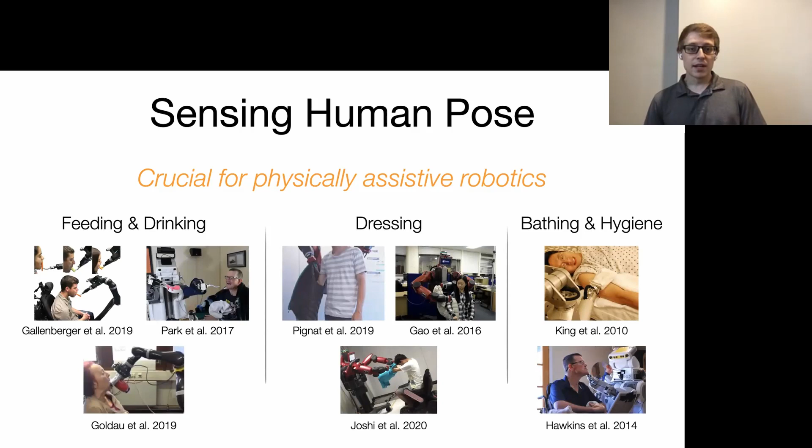Now, there's a couple different methods that robots have used to sense human pose in the past. Probably one of the most common ones is visual perception, such as with a camera. For example, you might be familiar with tools like OpenPose. However, the robot's own body and different objects like fabric garments can all visually occlude sight of a person. Another approach is force perception, where a robot is using its sense of touch or a force torque sensor in order to sense where a person's body is. But this requires robots to be continuously making contact and applying force to a person in order to sense where their body is.

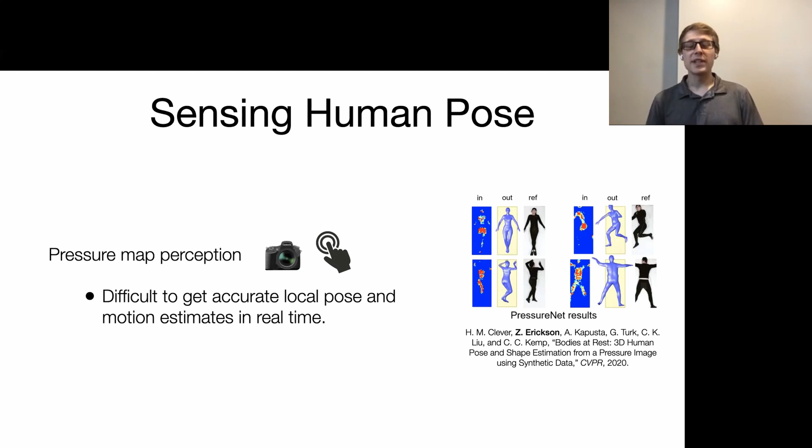And more recently, my colleagues and other research groups have demonstrated how robots can use a pressure mat on a bed in order to estimate a person's pose, as well as approximate geometries of their body, including their gender. Yet approaches like this struggle with estimating local pose details or tracking human motion in real time. But I really want to emphasize, why can't we just use a camera on a robot? It seems like the most intuitive thing to try first.

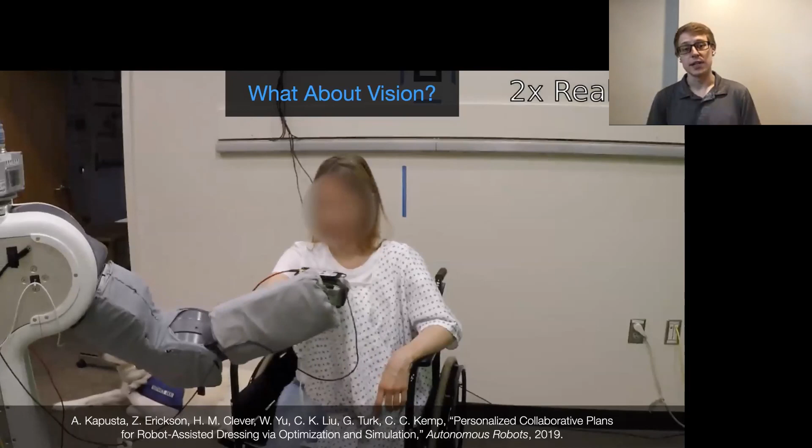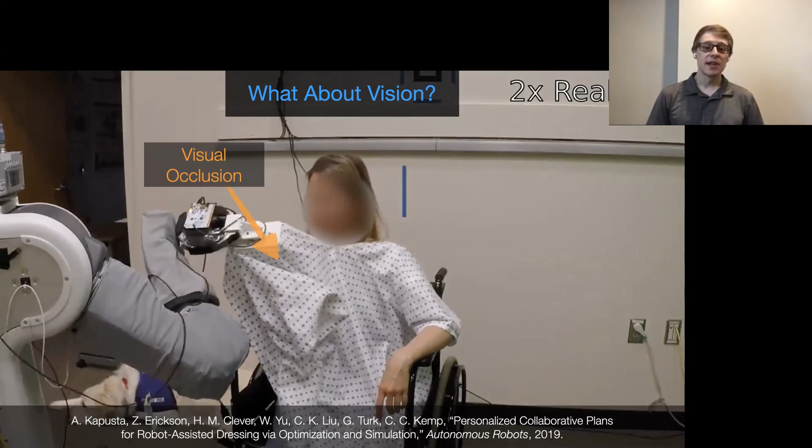And it turns out that there's a lot of scenarios in physical interaction where substantial parts of the human body become visually occluded. In this case, about halfway through this dressing scenario where a robot is helping pull the sleeve of a hospital gown onto a person's arm, the robot is no longer able to see the person's body. Not only is the robot's own arm getting in the way of its cameras, this fabric garment is also visually occluding sight of the person. So if the person is moving around underneath this cloth, the robot isn't going to be able to visually see that.

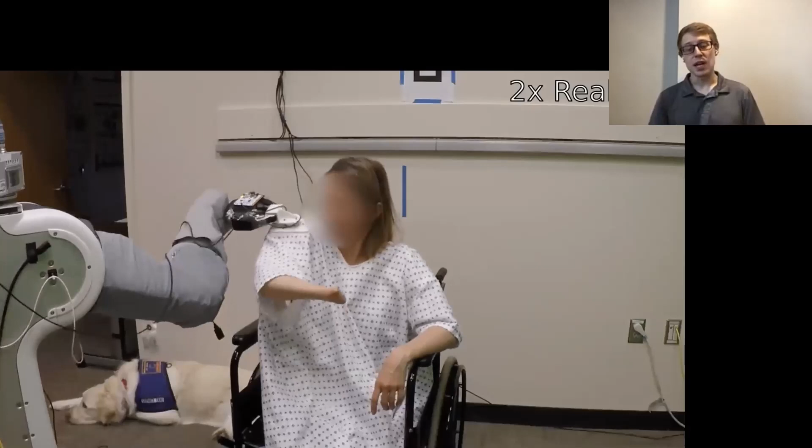And this lack of vision is one of the major challenges that capacitive sensing, what I'll talk about in this talk, aims to address. And in fact, in this video, the robot is using capacitive servoing to adapt to any arm movements made by this participant.

So what I'd like to share with you is how we've developed new capacitive sensors that can be used to accurately sense local human pose near a robot's end effector. We use learning to build pose estimation models from capacitance data, and then we evaluate through human studies how robots can use the sensor to perform servoing around the human body and adapt to human motion during physical assistance.

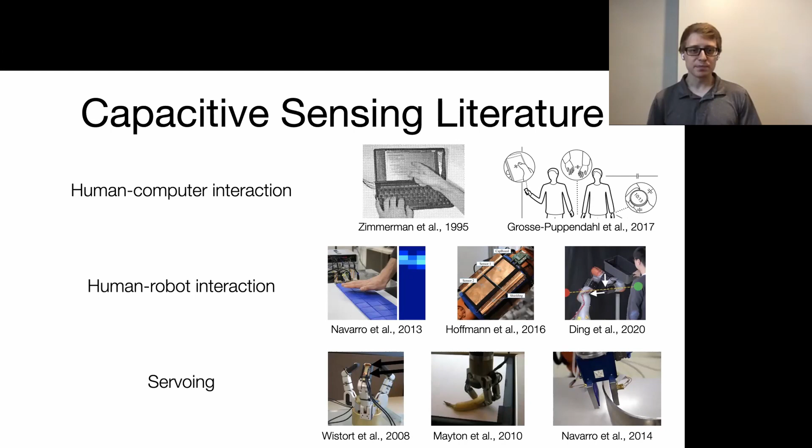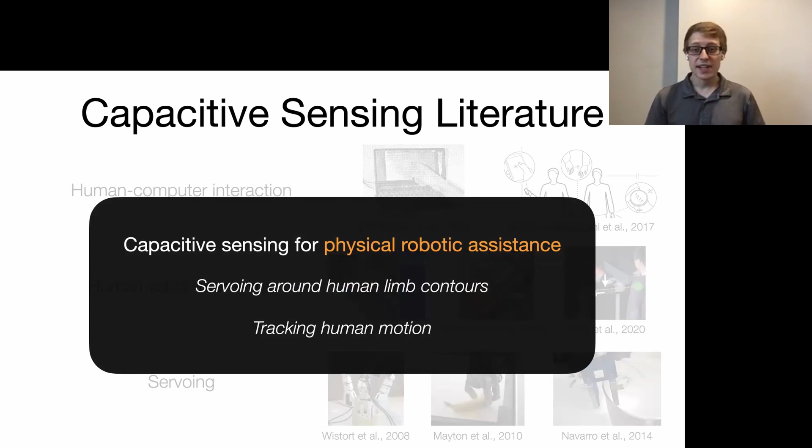However, in comparison to prior work, we explore capacitive sensing for physical robotic assistance, including servoing around the contours of human limbs and tracking human limb motion in real time. So when compared to other pose estimation approaches, capacitive sensing is offering robots a number of benefits. It allows robots to sense through some visually opaque materials, such as clothing and wet cloth. It doesn't require robots to make contact with people in order to sense them. And it also allows robots to track human motion in real time.

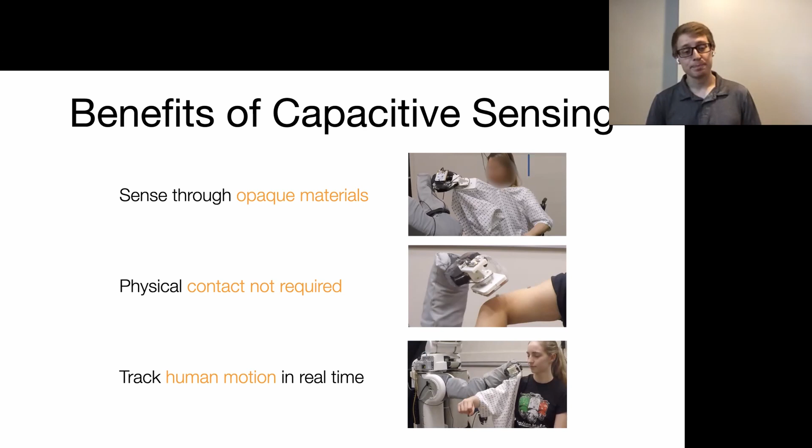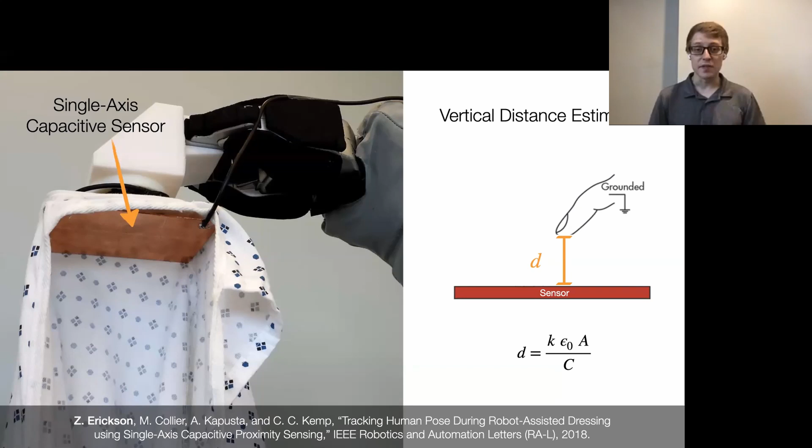So to start, we developed a single axis capacitive sensor, which can be either held or in this case mounted to a robot's end effector. Shown here, this is a PR2's end effector. And then we explore how a robot could use this sensor to estimate the vertical distance to a person's body in real time when providing assistance, such as dressing on the sleeve of a hospital gown. And with this sensor, we collected data from a single human participant as the PR2 robot moved the capacitive sensor downwards towards a person's hand.

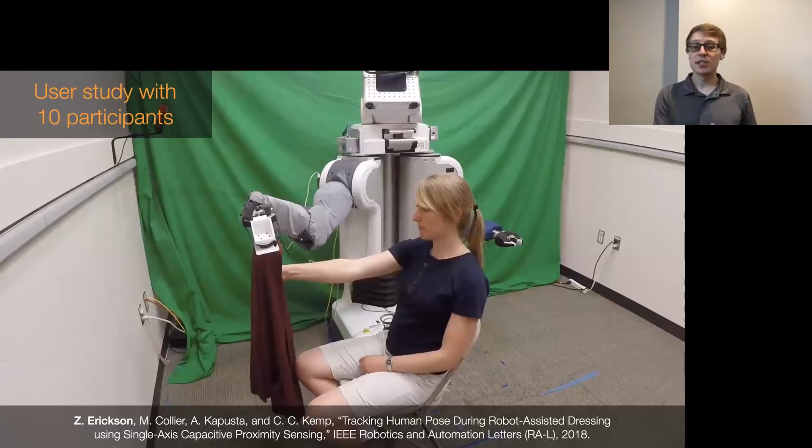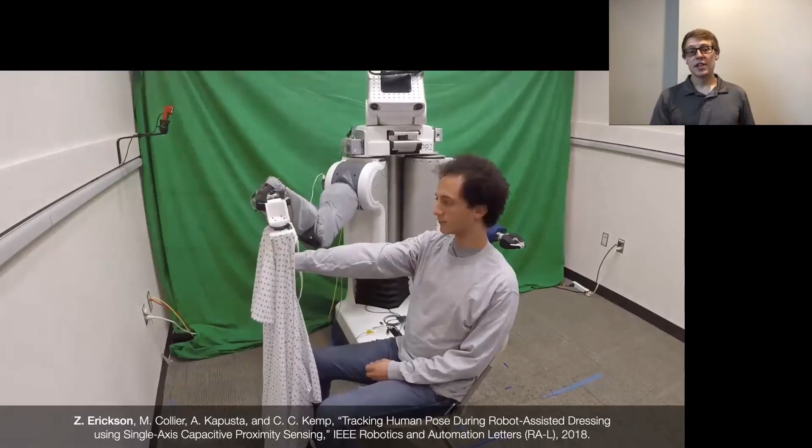We then conducted a study with 10 able-bodied human participants in which the robot used this capacitive sensing technique to sense and adapt to vertical arm motions made by participants while dressing on two different garments, both a hospital gown and, in this video shown above here, a long sleeve sweater. And this even works if participants are wearing long sleeve non-conductive cotton clothing. Despite this unscripted human motion, the robot's end effector is able to stay within approximately 5 centimeters above each participant's arm, and capacitive sensing is allowing the robot to track human motion in real time, regardless of visual occlusions.

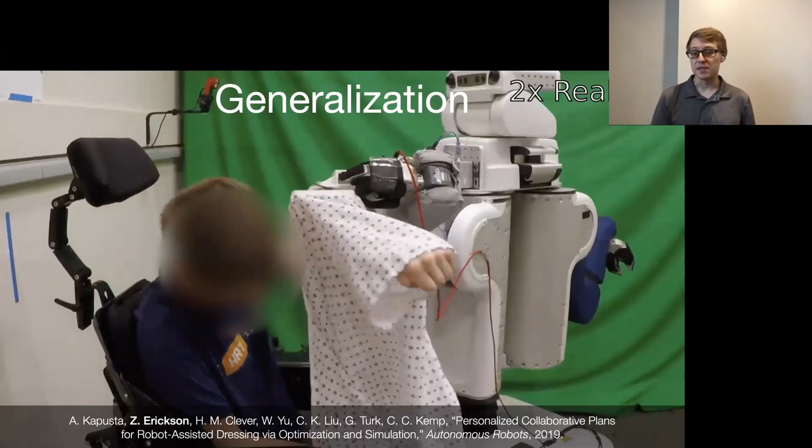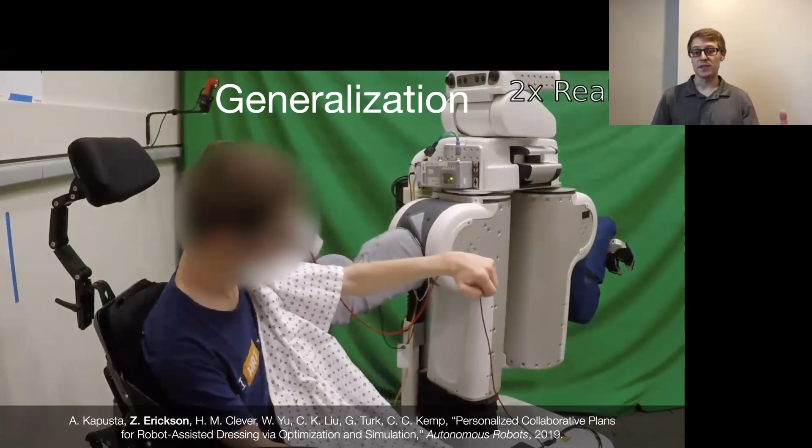And in more recent work, we've demonstrated this capacitive sensing technique for providing dressing assistance to individuals with physical disabilities. This same model optimized for a single able-bodied participant generalized to people with disabilities. And in this case here, the robot is using a capacitive sensor to adapt dressing trajectories that it has learned in simulation. Capacitive sensing is allowing the robot to adapt to the involuntary vertical motions made by this participant with cerebral palsy while dressing both sleeves of a hospital gown here.

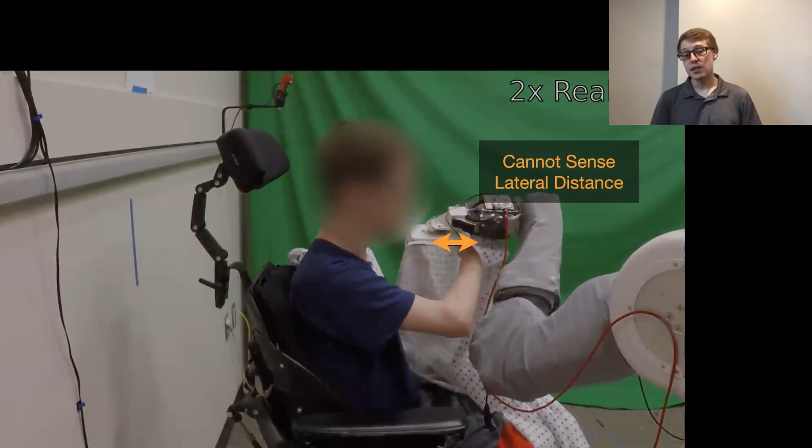But there is a limitation to this method. This single axis sensor only senses the vertical distance between the sensor and a person's limb. It's not able to sense other types of motions or distances, such as this lateral distance, where a person's arm is no longer directly underneath the sensor, nor is it able to sense the orientation of a person's limb in space. So how can we estimate this kind of human motion during physical human-robot interaction?

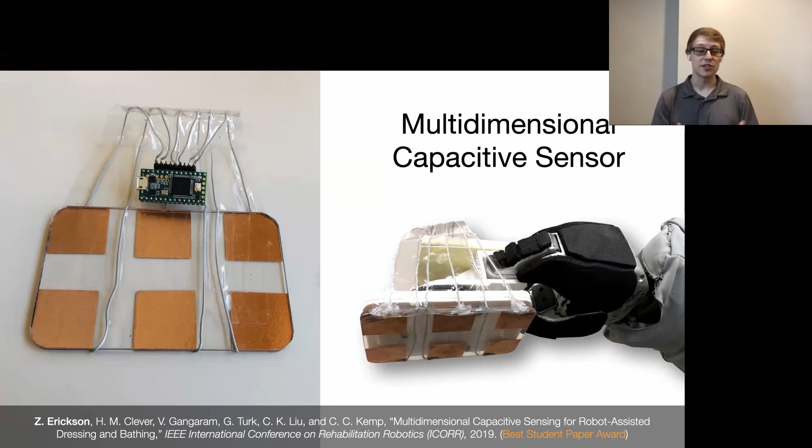We do so by developing a multi-dimensional capacitive sensor. And this sensor consists of a 3x2 grid of copper capacitive electrodes, which are connected to an Arduino microcontroller board. And these electrodes emit an electric field, which in turn allows the robot to sense conductive objects, such as the human body. And now with this new multi-electrode capacitive sensor, the robot can again sense the human body from about 10 to 15 centimeters away. We can sample capacitance measurements at frequencies over 100 hertz, which allows us real-time sampling and adaptation.

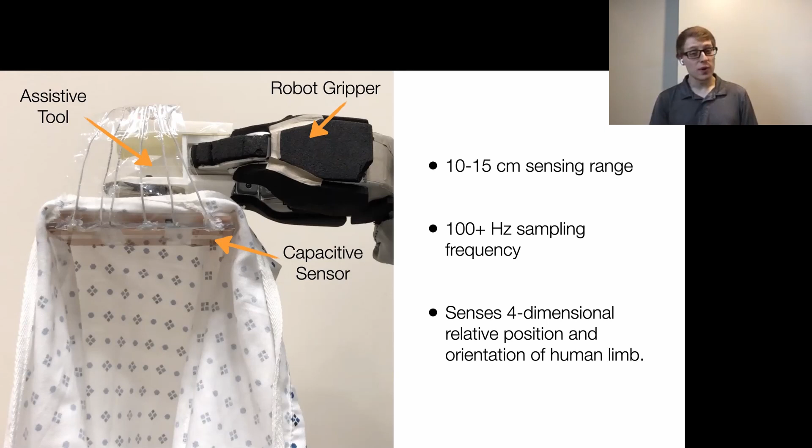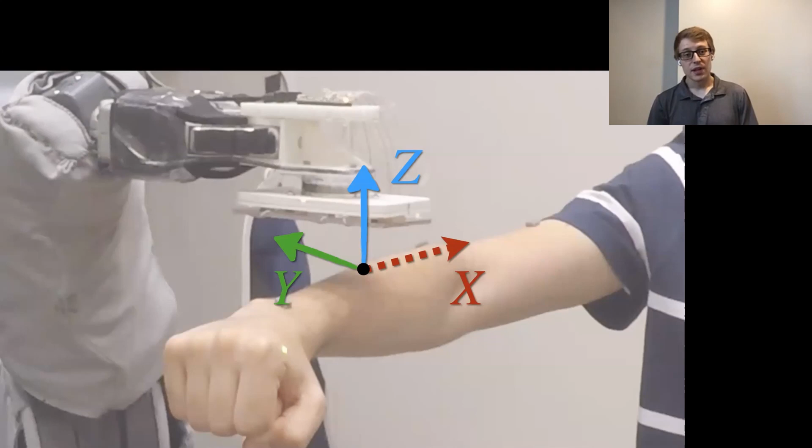Yet the most important aspect here is that we're able to sense four-dimensional relative pose, or position and orientation, of a human limb. But what do I mean by sensing four-dimensional pose? Well, here's a PR2 robot again, and in the center is that capacitive sensor. And if we zoom in, what we're going to be looking at is a point on the person's limb that's closest to the center of that capacitive sensor. So now, given this point, let's look at what is this relative pose that a robot is sensing? What are these four dimensions?

Well, the first two dimensions are going to be this lateral and vertical distance between the capacitive sensor and the highest nearby point on a person's limb. The third dimension is going to be this pitch orientation between the sensor and now an axis running along the surface of a person's limb. And then the last dimension is this yaw orientation now between the sensor and the central axis of the limb. And together, this represents the four-dimensional pose of a person's limb that a robot is going to be sensing. And if you're wondering why this isn't 6 dimensions, it's because of the ambiguity along a central axis of a cylindrically shaped limb.

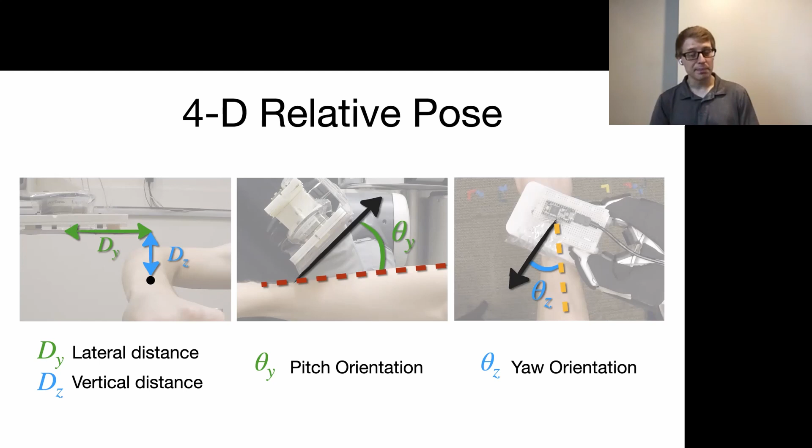So to control a robot to perform servoing around the human body, we use a PD controller, a proportional derivative controller, to update the robot's target end effector pose. This is a fairly straightforward controller, so I'm not going to dive into the details of how it works. But I will note that one of the benefits of using a capacitive sensor is that it enables robots to perform complex assistive tasks like helping someone get dressed or cleaning off their body with very simple control algorithms.

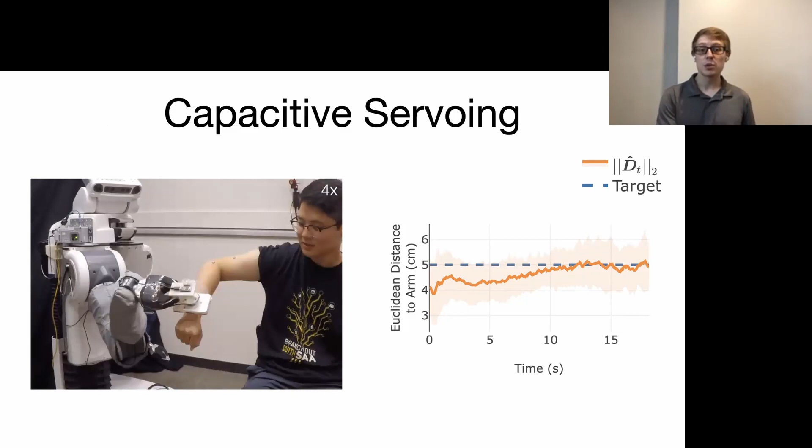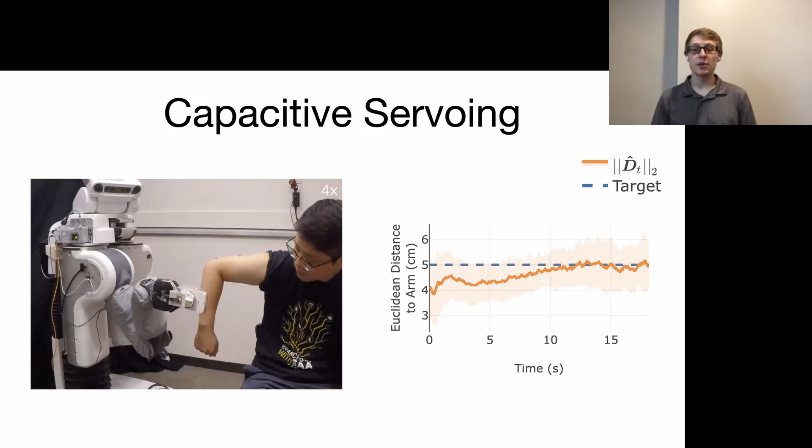So as a part of this work, we also presented a servoing algorithm for a robot to control its end effector both proximally and distally along a human limb using a capacitive sensor, as shown in the video on the left here. And throughout our trials with participants, capacitive servoing was able to keep the robot's end effector on average within 1 centimeter from a target distance away from a human arm, while simultaneously traversing along the arm around a bent elbow.

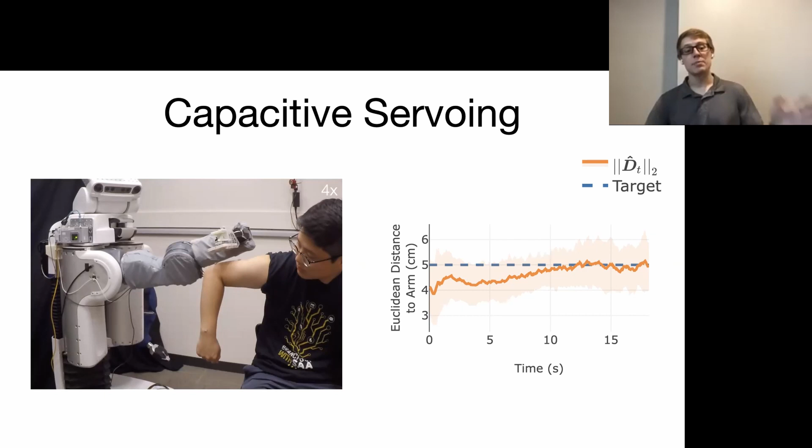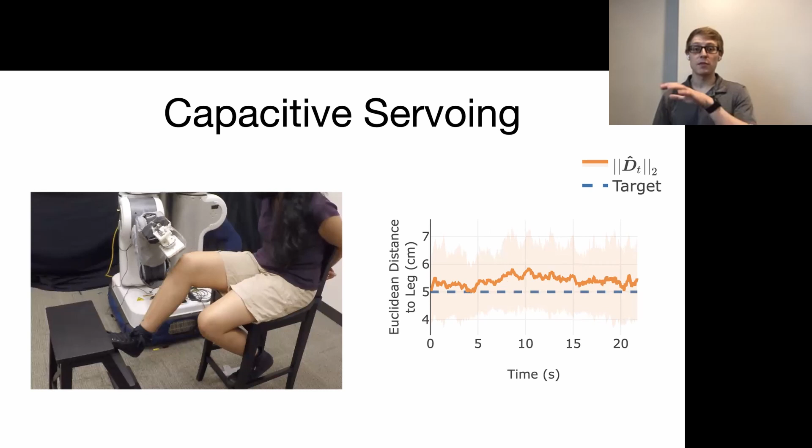And we also evaluated the case where the robot navigates along a human leg. Again, the capacitive servoing kept the robot's end effector on average within 1 centimeter from a target distance away from the top of a human leg. And this enabled the robot to traverse its end effector from the thigh of a person all the way down to their ankle around a bent knee.

We then conducted a separate study with 4 able-bodied participants in which we had to provide assistance for 2 different activities of daily living. The first one we've already seen before, dressing, pulling on the sleeve of a hospital gown onto a person's arm. But the second task is now bathing assistance, in which the robot is using a wet washcloth in order to clean off a person's arm or leg.

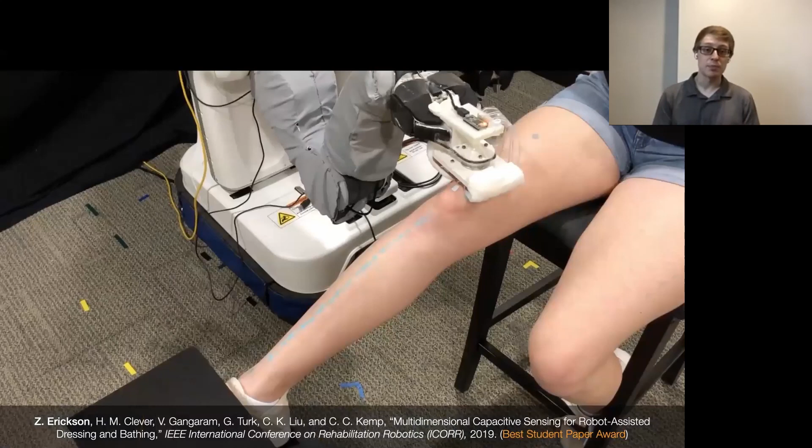And in the next part of our experiments, we assessed how the robot can use this same approach to assist with another task, bathing assistance, where here the robot is using capacitive servoing along with a wet washcloth. So a wet washcloth is placed over these sensors, and this allows the robot to navigate and clean off the surface of a person's leg.

And overall, we find that this approach works well, but it isn't perfect. Sensing the human limb through wet cloth is challenging, and here the robot failed to fully clean off the leg. It briefly lost track of the knee and missed some of the blue powder near the knee, resulting in a failure case here.

And similarly, we also look at bathing assistance along the human arm. Despite only being trained on a single human participant and with limited training data, capacitive servoing was still able to generalize across multiple people with varying sized limbs.

And generally, this type of sensory modality is ultimately working towards the development of intelligent robotic caregivers in healthcare. My goal of bringing robotic caregivers into real environments to assist and interact with real people who require daily care and physical assistance with activities of daily living or self-care tasks.

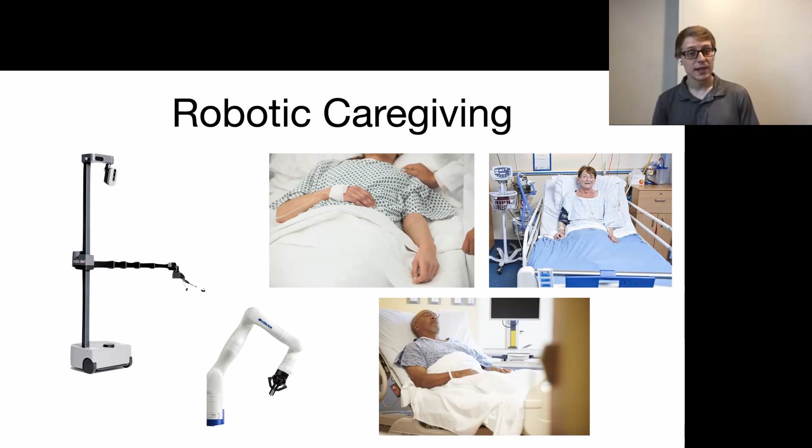And so overall, capacitive servoing is a new technique that enables robots to both follow trajectories along the body and track human motion in real time. We've developed new capacitive sensors for robots to accurately sense the human body. We've trained pose estimation models based on capacitance data from these sensors.

And then we've performed evaluations through human studies in which we found that this servoing approach generalizes well across people for multiple physical assistance tasks, including both dressing and bathing assistance.

And so with that, thank you. It's been a joy sharing this research with you all, and I'd be happy to take any questions now. Thank you, Zackory, for this very, very interesting talk. Yeah, a small round of applause. Yeah, so actually, I will get ahead of the other people and ask a question myself.

And, go for it. So one of the things I found interesting about your research is your intensive study with users and end users. And I was wondering, do you have any future perspectives on this? So in terms of application, you showed dressing and washing, but have you thought about maybe handover tasks? Is this something that is on your horizon?

So I guess it's also a kind of essential capability, skill in assisted living. So that would be my question. What is your future perspective on what kind of studies would be interesting? Yeah, this is a good point.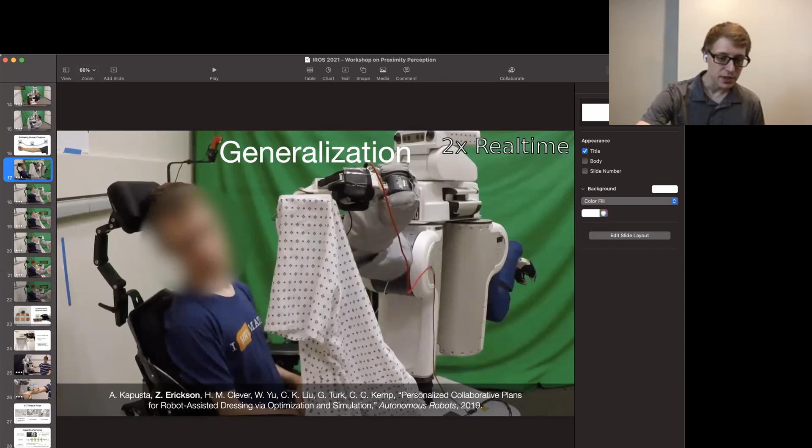It's more focused on evaluating the technical contributions of the work and how well the sensor performs, rather than the real world impact of it. But even in those cases with able-bodied participants, we really start to investigate how much these sensors can adapt to in terms of human motions. How quickly can they adapt, the magnitude and speed of adaptation to different types of motions, and then following different contours of the body, bending around elbow joints and such.

Thanks, Zackory. I actually am very interested in continuing this discussion, but I'll leave the other participants to ask questions as well. And I didn't know which one was first. I think it was Christian or Hubert.

Right. So thanks, Zackory, for this nice talk. I have to say, that's really a great achievement, that you can show that you can use capacitive sensors and train a system which is then in the end able to assist a human. So I think this is really pushing forward the whole topic of proximity perception. It's really nice to see.

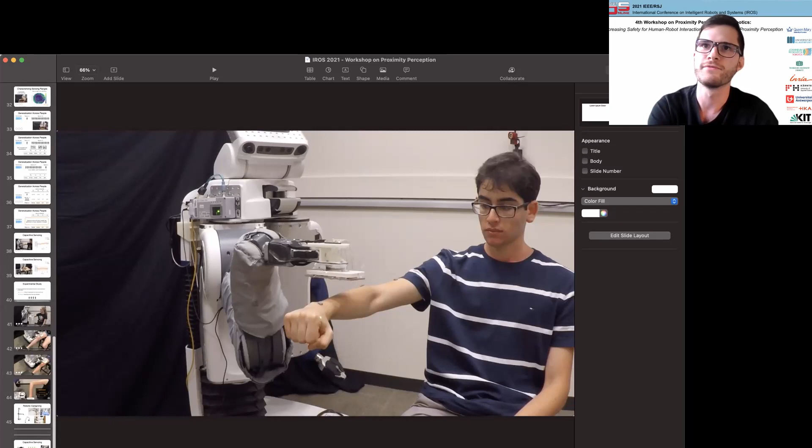I'm wondering, maybe comment on current limitations this system has, and what is your conclusion out of this, and how would you continue? For example, thinking of other types of sensors, fusing them with capacitive sensors. Do you have any ideas on that and some specific approaches in mind? Yeah. So there's two parts there. One is what are the limitations, and then what are the multimodal sensing opportunities.

From a limitations perspective, there's one I already noted, which is that some types of objects are conductive and do interfere with the electric fields that are emitted from a capacitive sensor. Obviously, many of us know this well. Wet cloth happens to be one of those.

And so in this case, using wet cloth doesn't prevent capacitive sensors from working. It just significantly reduces the range over which they can sense other conductive objects through it, right? So sensing the human body through wet cloth. So that's one clear limitation, or avenue for improvement, maybe.

There's also, I think, a very clear limitation: it's very difficult to both have lots of sensors and have them small enough. There's this weird scenario where you want lots of sensors and you want them to be small, but you also want to sense really far away from the robot, right? And that combination doesn't really work out that well. Maybe I have a better figure for this.

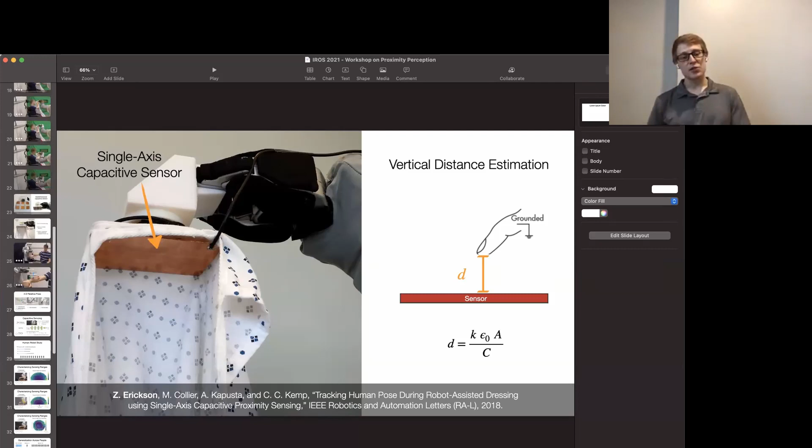So there's this fine balance between the size of the capacitive electrodes and the distance over which you can sense. So that's another current limitation. If you want a lot of different sensors, you can almost think of them as a bunch of proximity sensors, using them to build a proximity map of different objects near the sensor, right?

The more sensors you have, the higher resolution the proximity map you could build, but there's that limitation: the more sensors you have in a smaller surface area, the less distance you can typically sense. So that would be, I would say, another major challenge.

Just a small remark: we are also interested in this subject, and there were some ideas of using a dynamic spatial resolution where you short circuit some sensing elements so they become a larger electrode, so you increase the sensing range, and if you're closer, you can increase the spatial resolution. It doesn't work as nicely as it sounds, but it's at least an idea that can be promising.

Yeah. You also have to deal with challenges like electromagnetic interference, with all these different electrodes connected together or potentially overlaid. But I do like that idea of essentially a switch that's connecting or disconnecting different electrodes. You can go from high resolution to low resolution, and in approximately real time change how far away the robot can sense versus its resolution in that sensing range. Yeah, I really like that.

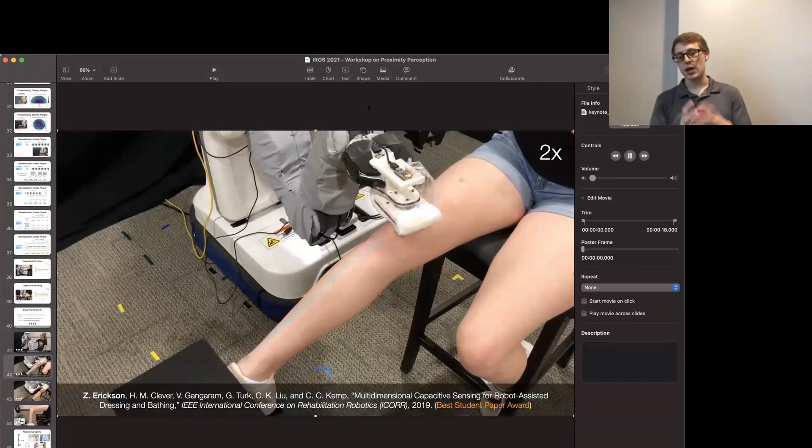Where it's not just a linear path here. Even in here, there's a bend in the knee. So the robot's actually having to rotate around the knee if we kind of play this. And that's one of those elements where capacitive sensing comes into play, is that you have an array of electrodes. And once you start getting past the knee, some of those electrodes are sensing, oh, we're now shifting and we need to rotate around a knee here. So that's one element that capacitive sensing helps with.

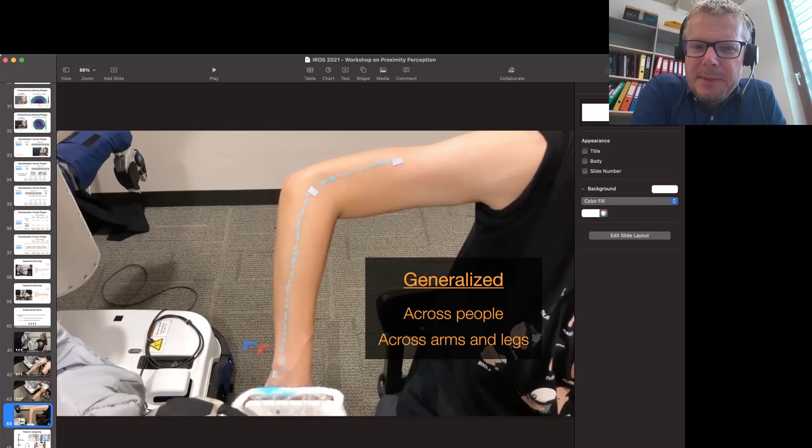And of course, if you start looking at different types of geometries or shapes, bends of elbows, capacitive sensing allows a robot to sense when it needs to traverse around an elbow. And again, if a person is moving during this process, so if a person drops down, capacitive sensing could sense that as well. So I would say that those are some of the key benefits of it for bathing assistance, is it handles both maintaining contact, but also adapting and following the contours of a person's limb.

So essentially you had the 6 electrodes, and more or less the outer ones were for proximity, and you maintain the distance for these outer ones, because I assume that the middle one was in contact, basically, just with the wet cloth in between.

Yeah, so this is where there's probably a few details I actually missed in explaining this. But essentially the robot is being told keep the end effector within like half a centimeter from the arm, essentially the thickness of the cloth, and then keep the sensor centered along the central axis of the limb. And so essentially keeping the center 2 electrodes in the middle of the person's limb as it's traversing along the limb. So there's a couple of details in the controller of how this works.

Essentially, the only difference between dressing and bathing assistance is telling the robot a target. Instead of staying like 5 centimeters above a person's limb, you're now making contact with the limb. And that's really pretty much the only difference between these 2 scenarios, is the target upon which the controller tries to keep the end effector.

Nevertheless, the wet cloth is also quite conductive, and more or less, you should only measure the distance to the wet cloth. So why can you measure through this? Can you say maybe something about the measurement frequency that you have been using here?

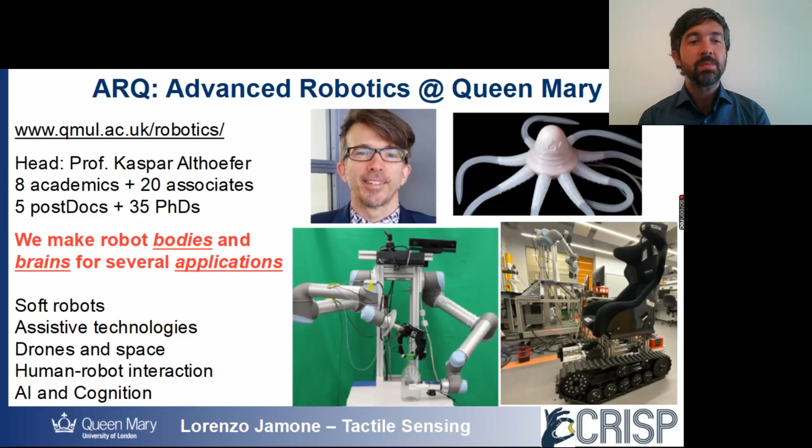I'm part of ARQ, which is Advanced Robotics at Queen Mary, led by Kaspar. We do robotics in a wide sense. We do robot bodies and brains, and we apply them to several applications. You can see some examples of the amazing soft robots Kaspar does with his team. My team is mostly focused on manipulation and cognitive robotics, and in fact, we go by the name of CRISP, Cognitive Robotics and Intelligent Systems for the People. This is a picture of the team, a PhD student, a postdoc, and myself.

Within cognitive robotics, what we mainly focus on is what I call the intelligence of our hands, which relates to the ability we have as humans to grasp and manipulate objects, but also to explore objects haptically and gather information about them, and even use our hands for communication with others. At Queen Mary, I carry on this research with funding from several funding agencies and companies, and you can see some of the logos around. In particular, I'm currently working on two projects that I will quickly introduce.

One is called the MAN-3 project, on human-inspired robotic manipulation. Here we try to transfer the intelligence of humans to a robot by demonstration. The idea is that a human will demonstrate to a robot, by teleoperation, how to do some dexterous manipulation task. Then we can learn the essence of those actions and reproduce it in different contexts.

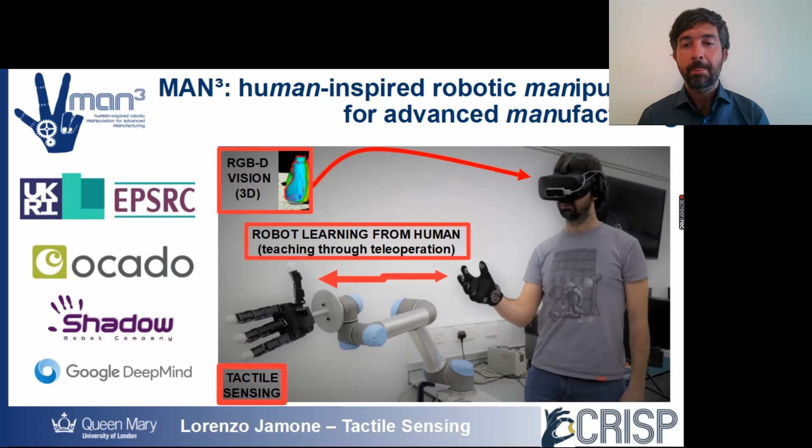Another project we are involved in, a different scenario, is in nuclear decommissioning. Here at Queen Mary, we have different people working on a number of different tasks. Again, I'm mainly involved in the aspects of tactile sensing and grasping and manipulation.

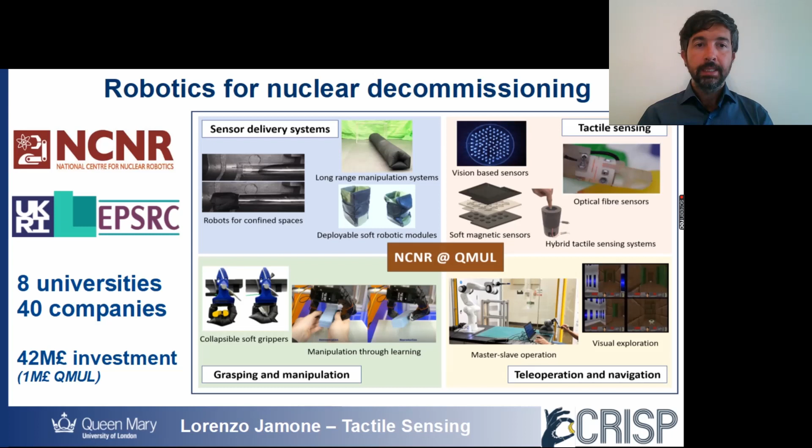Going more into the topic of this specific talk, I want to talk about tactile sensors and give some examples of how they can be used in robotic manipulation. As I said, I will talk about a particular kind of tactile sensor that I will now introduce, where the main ingredients are soft materials and magnetism.

If we look at humans, we use tactile sensing for a lot of things. We detect different properties of objects, and of course, tactile sensing is crucial in order to be able to manipulate objects, for example delicate objects without crushing them, but also to understand specific properties of objects, such as their shape or their texture. We would like to replicate this in robots.

If we think about robots today, the majority of robots employed, for example, in industry but also in other settings, can still do manipulation, but if they don't have tactile sensing, they will typically manipulate only hard objects. They will do it in structured environments, and most importantly, they will not gather additional information about the objects while they manipulate them.

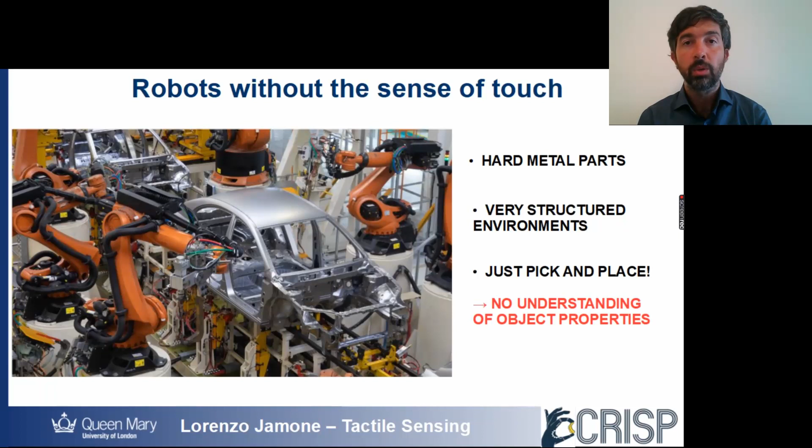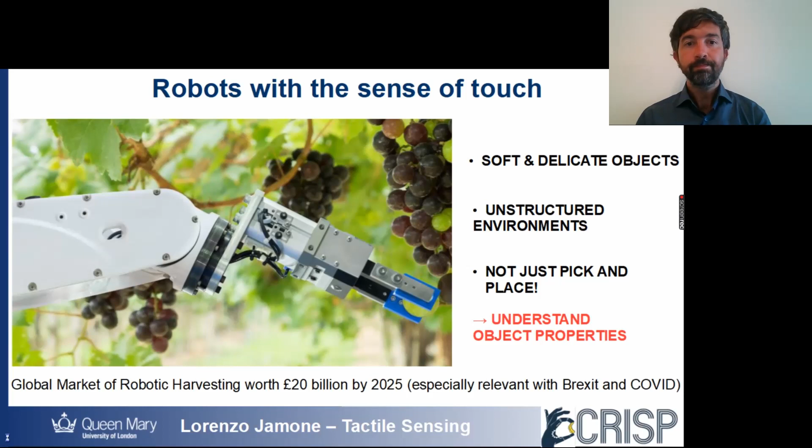So if we look at humans again, our sense of touch is based on several receptors that we have in the skin. Typically, these are mechanoreceptors. We have different kinds of them, and different sensors are good to detect different properties. And in my research, I took, I would say, mild inspiration from two different kinds of receptors that are present in the human skin, the Merkel disc and the hair follicle, to develop tactile sensors that are particularly good at detecting specific properties. And so we have these two families of sensors.

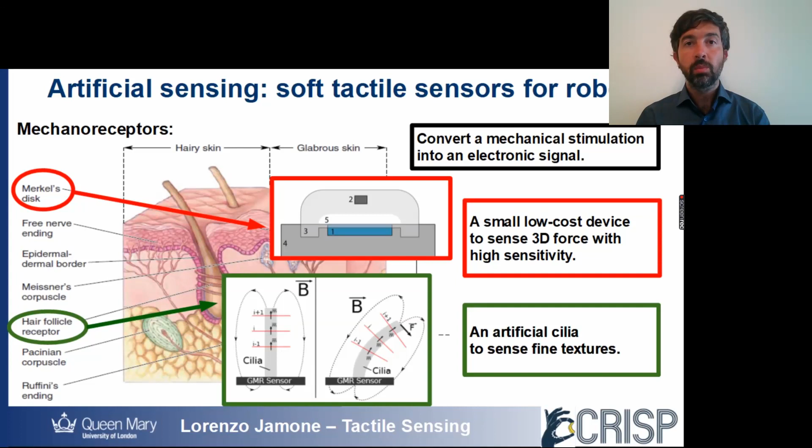But as I said, they share the main principle of using soft materials and magnetism. And I will tell you a bit more about how they work. So this first kind, if you see in the picture, we have a soft material, imagine some silicone or a deformable rubber, with a magnet immersed inside the soft material. And then we have a magnetic sensor below. In this case, this could be a Hall effect sensor, hopefully a 3D Hall effect sensor that will measure the magnetic field generated by this magnet on the 3 axes.

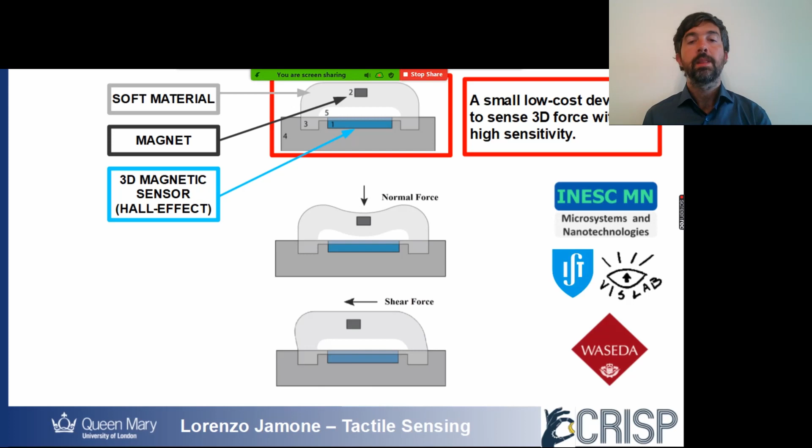Now, if you apply a force, there is a deformation of the material. The magnet will move with respect to the sensor, and therefore the magnetic field that is measured by this magnetic sensor will change. This can give us an indication of the normal force that is applied. But if we are using a 3D magnetic sensor, we can also measure the shear forces. So we can basically measure the distance in 3D between the magnet and the magnetic sensor. And therefore, this becomes a possibly very small and low-cost 3D force sensor that interestingly shows very high sensitivity. This is one of the properties that I always thought is very important for tactile sensing. It's probably the first property that you want to have in your tactile sensor.

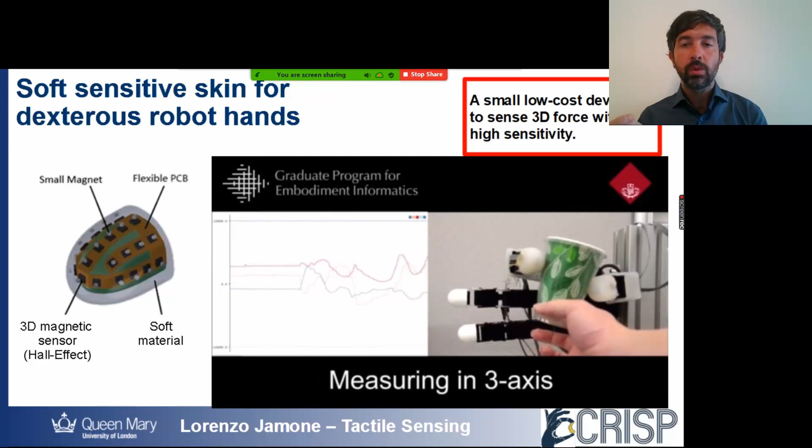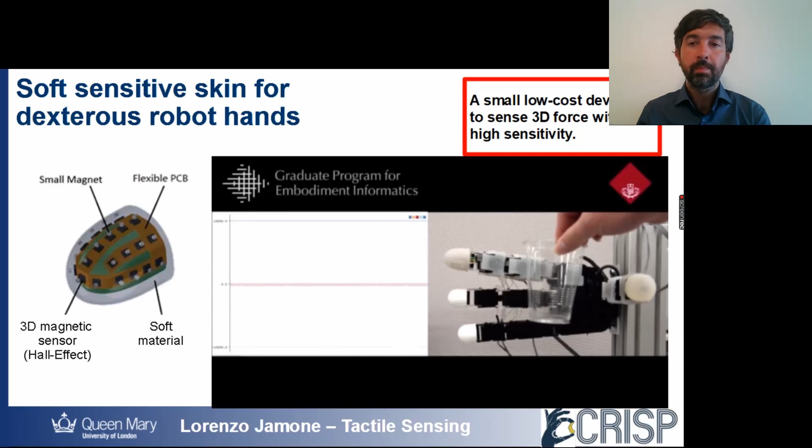And you see some examples here in which we are equipping a hand with several of these sensors. So we have a matrix of these 3D sensing elements on the fingertip of this robot. And we can not only manipulate the object delicately, and this is a very light object that you see, we can manipulate it without crushing it, but also without losing the grip. At the same time, we can say something about it, for example, the shape or maybe the weight. So, for example, if there is a change in the weight, we can detect it.

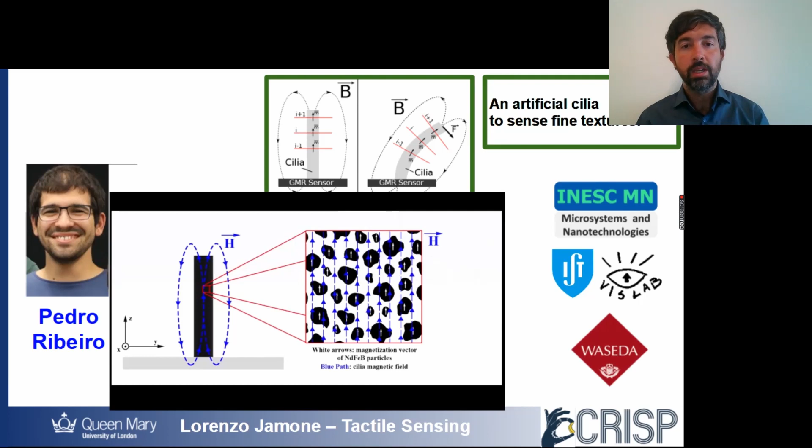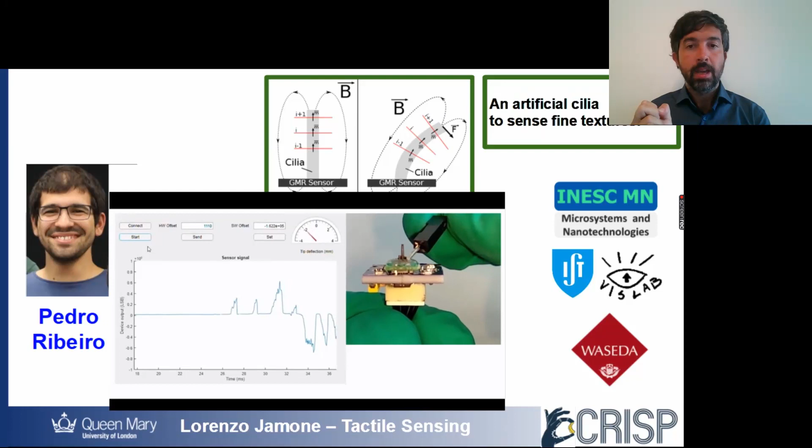The other family of sensors is inspired by the structure of a cilia. Cilia are present not just on our skin, but also in many biological systems. And here we have a cilia, so it's a tiny pillar. It is made of a soft material in which we embed magnetic particles. And then on the bottom, we have again a magnetic sensor, in this case a giant magnetoresistive sensor that can measure the changes in magnetic field. And you can see here some of the measurements coming from this sensor.

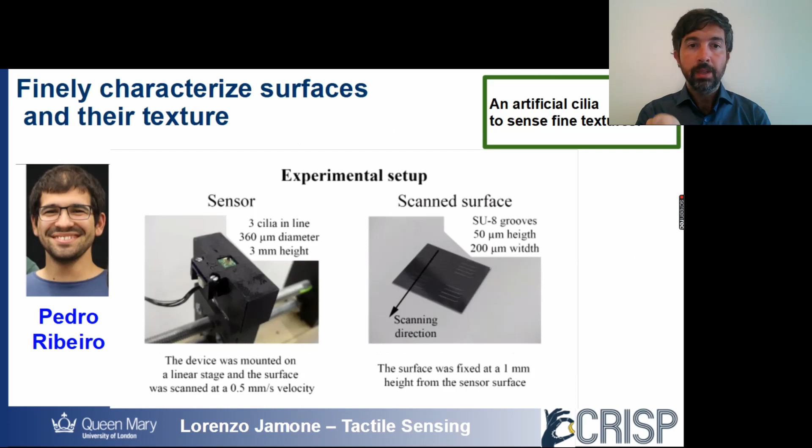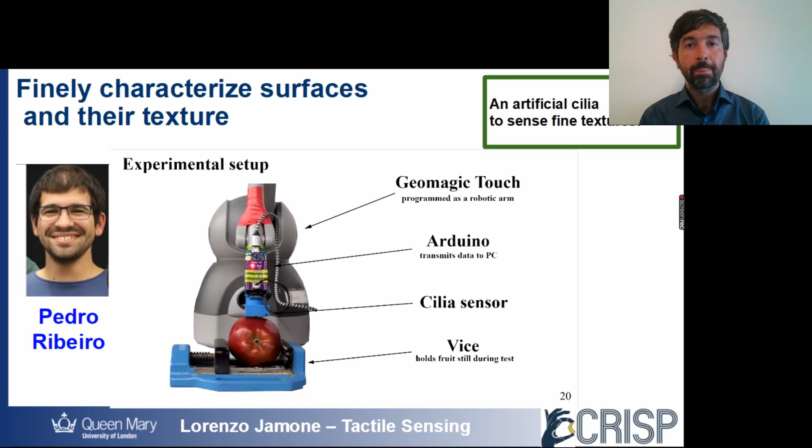Now, because of the sensor that we use, but especially also because of the structure of the cilia, this sensor is very good at detecting very small forces. And so we can use it to characterize surfaces. In this case, we are scanning a metal sheet with this sensor that is attached to the black robot, and we can see where the grooves are. In another application, we scan fruits, and basically just by a single scan after some training, we can tell whether the fruit is ripe or rotten.

And actually, the examples that I will show are not manipulation using only tactile sensing, but manipulation using a combination of vision and touch. Because of course, we are not saying here that vision is not useful or not important, but what we are saying is that tactile can add something.

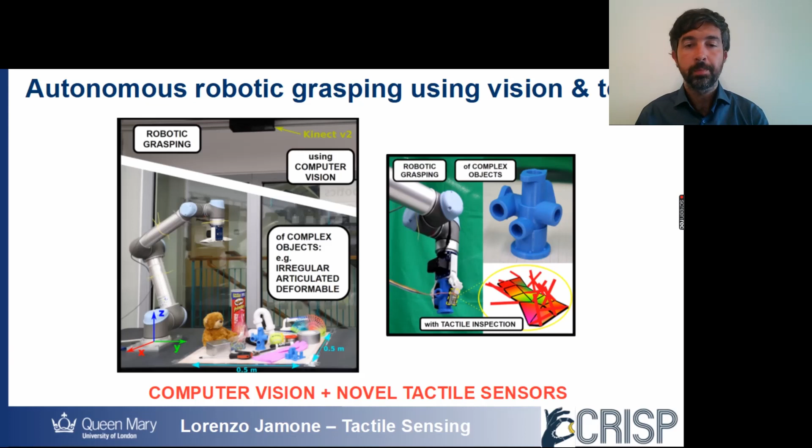But the example I'm showing now is of precise pick and place. So when you want to do precise pick and place, of course, you don't want to lose the object that you are picking, but also you want the object to be in the same pose with respect to the gripper when you grip it and when you pick it and when you place it. So this is the example.

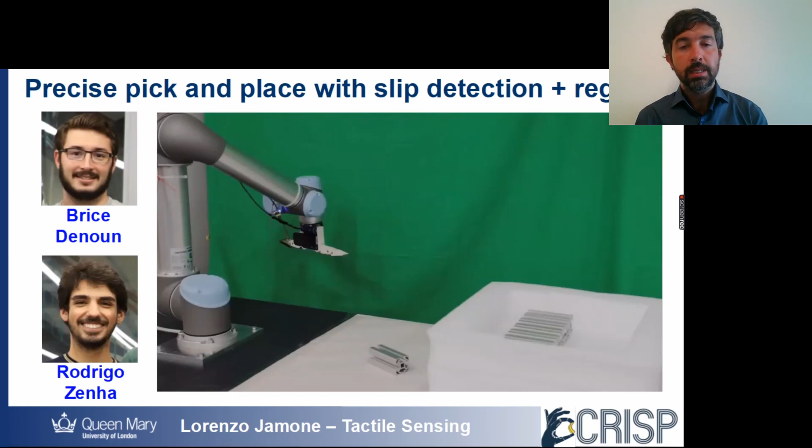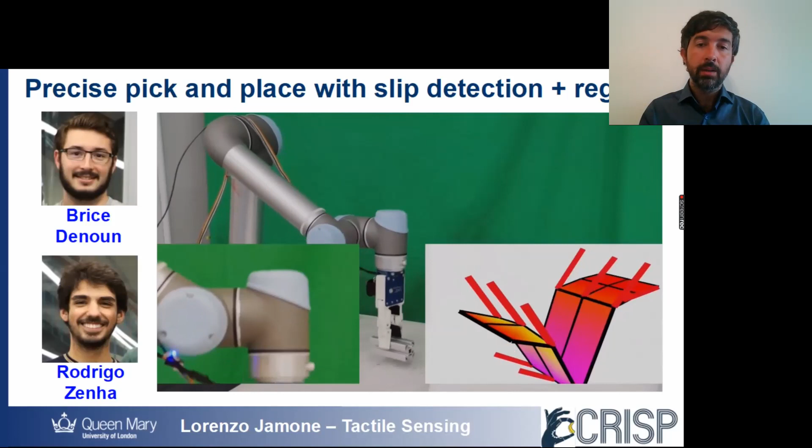Let's say we want to pick that object and precisely place it in the pile. Here, I show that we can detect that there is a slip. So if we detect a slip with the tactile sensor, then we go back, we take another image, and this time there is no slip, and because of that, we can position the object precisely. I'll just show you what the task is.

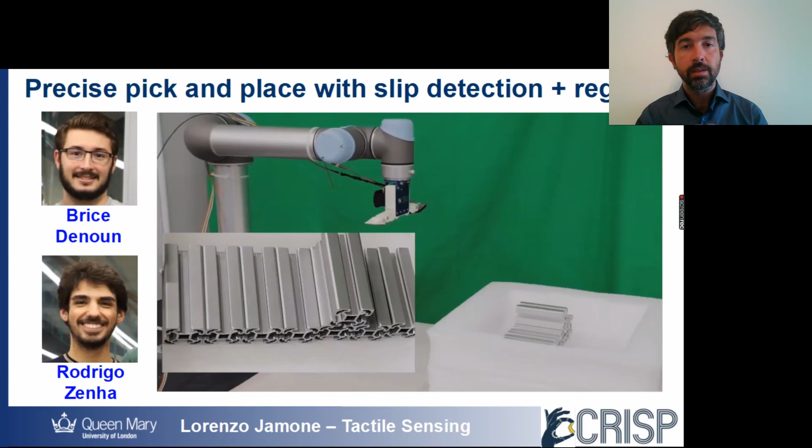Now we will go into a few details of how we realized this. So the first thing is the tactile slip detection. And this is actually a paper that is published in IROS this year. So here we did the first data collection. We call it in the wild because there is no specific procedure in a structured environment, but basically we put the object there, and from vision, we realize where the object is, we pick it, we shake it around, and then we put it back.

And this is wild data in the sense that the interaction between the object and the tactile sensor can be very different from trial to trial. And you can see we're showing here some events of slips and no slips. And note that some of the slip events do not necessarily cause the object to fall, but the pose of the object in the gripper changes. And that's something we also want to avoid.

So we use this data to train some classifiers, and interestingly, even though the data was collected, as I say, in the wild, we can show very good classification accuracy. At the same time, the same data can be used also for object recognition. I'm not going to show our results for object recognition, but you can quickly see from the tactile signatures of the objects that even if the same object, for example, a tennis ball, is grasped in a different position, there is a similar tactile signature. And so clearly, this can be good data to be used in a classifier for object recognition.

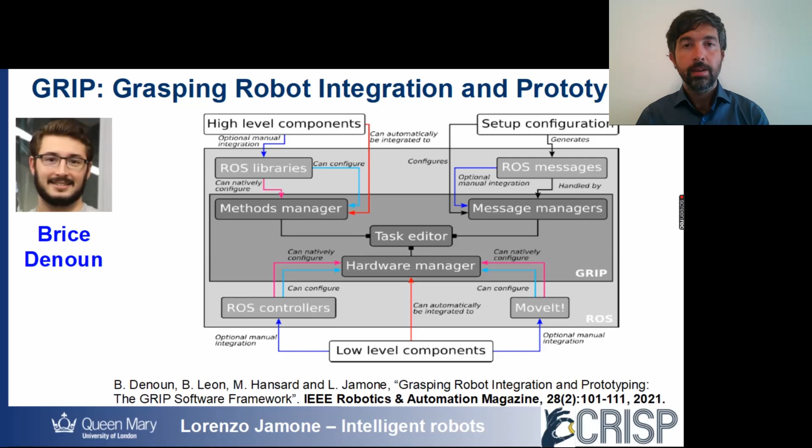Now, in order to program the task that you saw initially, the precise pick and place, I would like to quickly introduce this software framework that one of our students developed. It's called GRIP: grasping robot integration and prototyping. It is basically a software framework that allows people to program a robot in a simpler way. And we use this also in collaboration with several companies to realize a number of different tasks.

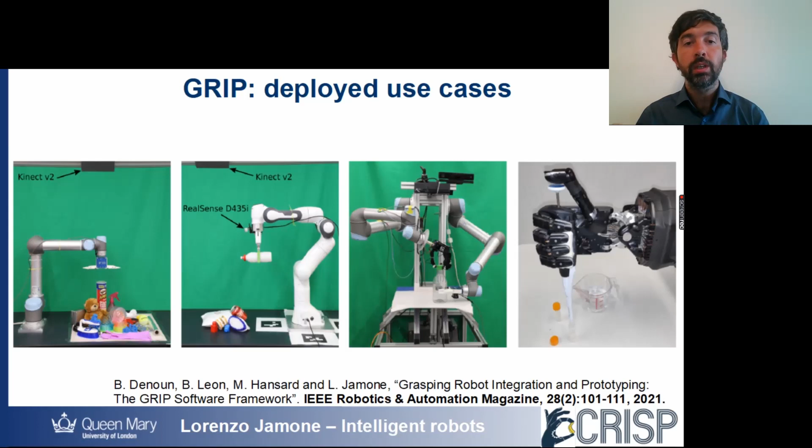And I will now show a quick video in which Brice, the student who developed the framework, will show you in practice how the task that I showed initially can be programmed with GRIP. So here is GRIP. Let's start with interfacing the robotic system, including the sensors. To do so, we first need to specify the URDF file, which is a description of the robot.

Then, instead of using GRIP to start and run the tactile sensor, we can decide to use the launch file provided by the slip detection method. What remains to be integrated to GRIP is one robot arm, one end effector, and the Kinect. So basically, you have a series of graphical user interfaces that allow you to program a robotic task just visually or adding some numerical information about the different positions, but without actually coding.

Now we can start designing the task by collecting a point cloud from the Kinect and using it to generate autonomously a grasp pose using the integrated component. You can navigate inside the editor, hiding the state configuration area by zooming out. If a grasp pose is generated, plan and move the arm to this point. The gripper now needs to be closed to grasp the object. Note that we use a predefined joint state as input of our server.

Now we want to move the arm above the table to test if a slip happens. Run the slip detection that will return the outcome corresponding to the orange socket if no slip is detected within 3 seconds. If that is the case, run the trajectory to place the object, go back to above the table and finish the task.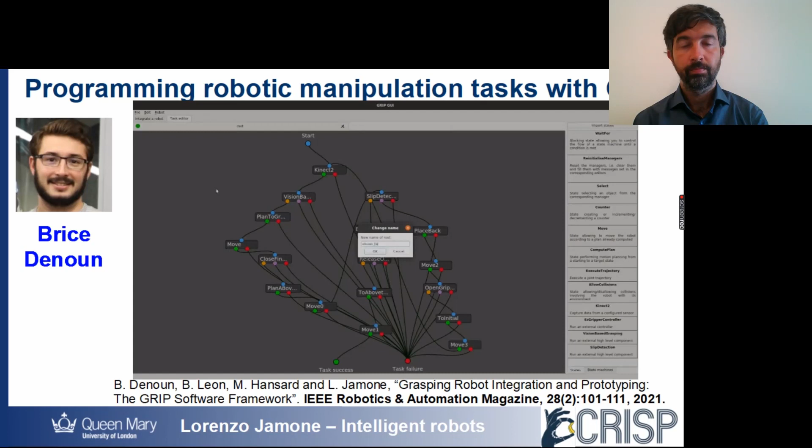And so you see here again the task I showed before. There is first visualization of depth data to find out where the object is. The grasp appears not to be stable. So we execute the grasp again, and the second time we have a better grasp. We check that there is no slip, and therefore the object can be precisely positioned in the pile.

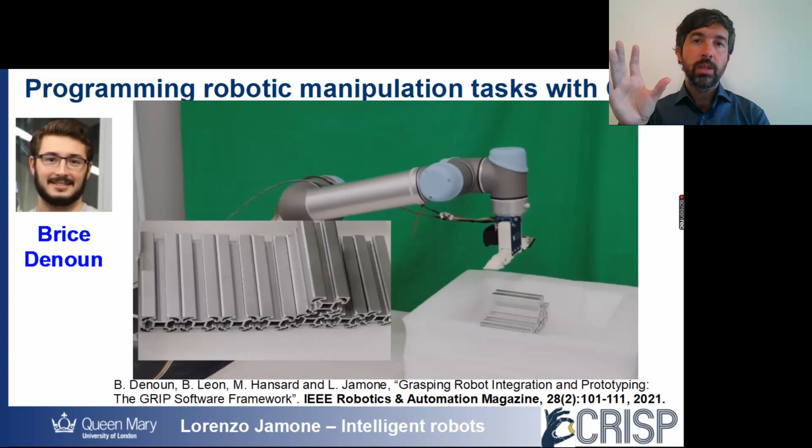Okay, so this was one example in which we used a gripper, a parallel gripper, and a flat tactile sensor that had a matrix of 3D sensing elements. So a lot of tactile information coming from that kind of sensor. I will show now a different experiment, which is done with the dexterous hand, a multi-finger hand.

In this case, we have a different kind of tactile sensor, not based on magnets, but that works similarly. But in this case, the sensor provides the 3D contact force, but only on a single point, and with a sensor that is a bit less sensitive than the one we did. But I will still show this. And maybe later we can comment on how a better sensor could achieve even better performances on this.

So this other example of how we can combine vision and touch is the idea to first locate an object and then go and explore haptically by touching the object in different positions. This is important if we want to make absolutely sure, or let's say if we want to maximize the chance that when we lift the object it is not going to drop. And this, although the process might be a bit slow, can be beneficial in situations in which you are handling something dangerous or very delicate, and you really don't want the object to fall.

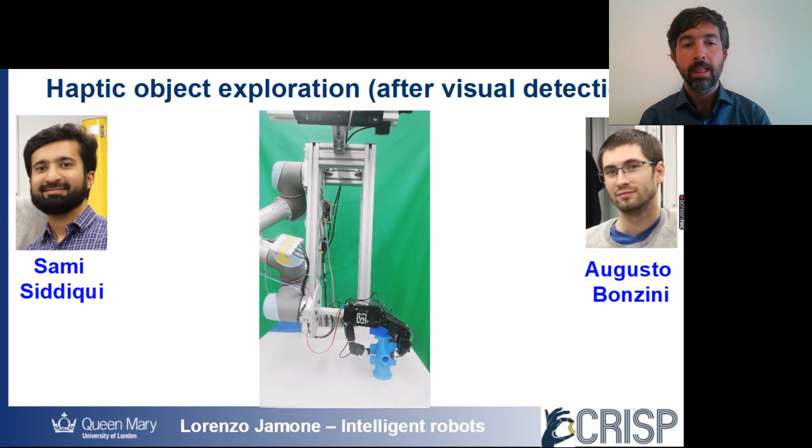And to do this, we employ something that was the topic of some earlier study we did in simulations a few years ago. In order to find out the best strategy to perform this haptic exploration, we used something called unscented Bayesian optimization. So in general, Bayesian optimization is a way to optimize a search when you want to find out what is the next best place to explore in order to maximize the amount of information and minimize the number of attempts.

Now, the unscented version of this allows you to do the same thing, but in addition to find solutions that are more resilient to noise. In the case of grasping, our search is basically driven by a grasp metric that, any time we touch the object, will tell us this grasp has a good value of the grasp metric, or this other grasp has a lower value or a higher value. If we do this with the unscented Bayesian optimization, we can find grasps that not only have a high value of the grasp metric, but also that are close by to other grasps that also have a high value.

In practice, if you see the images now on the screen, the safe grasp and the unsafe grasp, the unsafe grasp might be a grasp that is very good. But if you reproduce it and you have a position error of 1 centimeter, it is not good anymore. In this case, it's very close to the border of the object. The safe grasp is a grasp that has a high value of the metric, and if you reproduce it, also assuming that there will be some error, it's still a good grasp. So this is what the unscented Bayesian optimization gives us. And these were experiments that we did only in simulation.

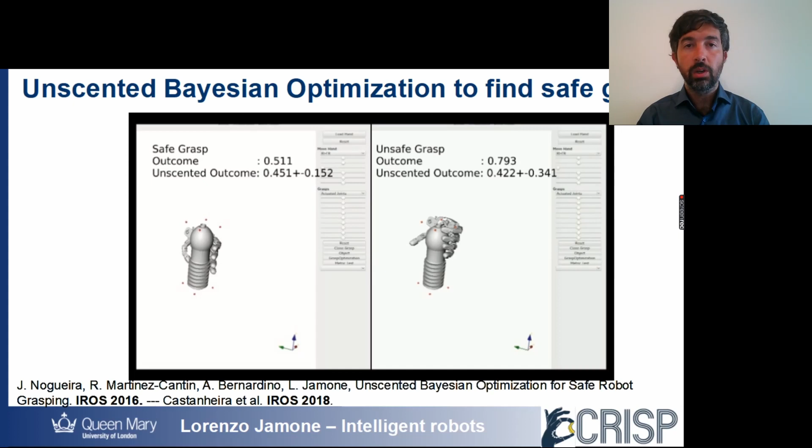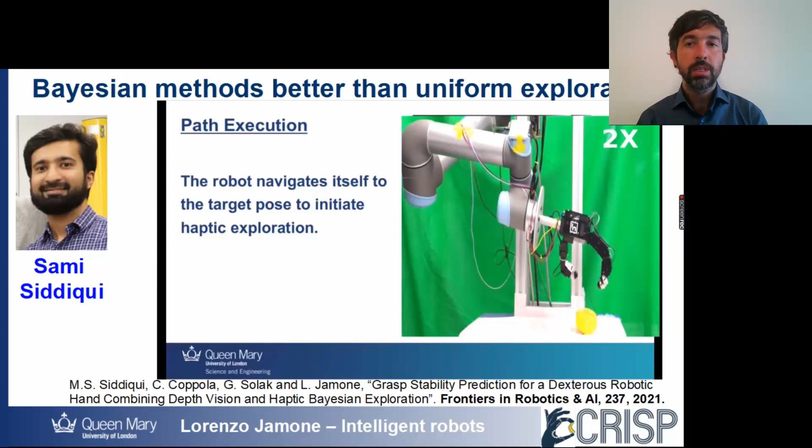More recently, Sami has worked on applying this to our robot. And here we see a similar pipeline in which the object is first detected with depth sensing. The rough position is detected, then there is some exploration, and then the objects are lifted. And here you see two possible outcomes, a stable grasp and an unstable grasp. Of course, there could be also a grasp that completely misses the object or that the object falls.

And just a comment on the tactile sensing. In this case, as I said, we are measuring the 3D force on each fingertip on one location. And we use that information in order to compute that grasp metric, which is a force closure grasp metric.

Okay, and this concludes my talk. Just to summarize quickly, I have introduced a family of tactile sensors that are based on soft material and magnetism. I think the most interesting characteristic of this kind of sensors, because of the way they're done, is that they are highly sensitive, so we can measure very low forces. And they can be manufactured very small.